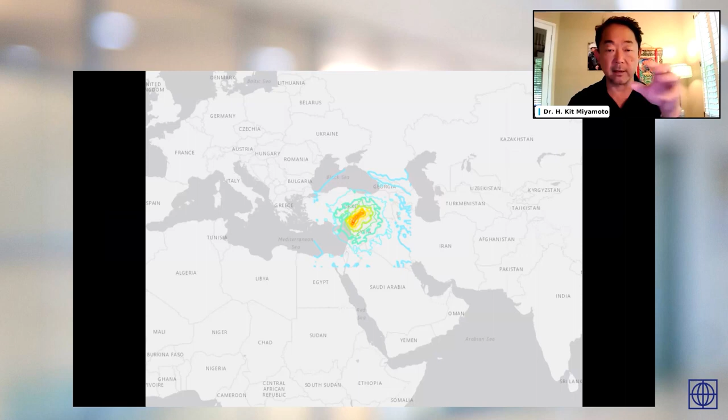Now, here is the location of the epicenter area of Turkey. You can see the Mediterranean Sea and the southern border right next to Syria. That's where the epicenter is.

The first one happened at magnitude 7.8, which is a big one, about 4 a.m. in the morning, and a few hours after, a 7.5 back to back. So it affected a large area—you're talking about a distance of probably 400 to 500 kilometers long and 100 to 200 kilometers wide, and a very mountainous area. So by any means, this is a huge disaster.

It's affecting almost 20% of the country. Unlike other earthquake places we visit, here it's huge mountains and snowy countries up in the high areas—unbelievable places. But it's also very difficult to get to certain areas, and the damage is widely spread across the whole area. This is truly one of the worst disasters I've seen, probably since the 2008 Sichuan earthquake. Some parts of the affected area are just destroyed, beyond imagination.

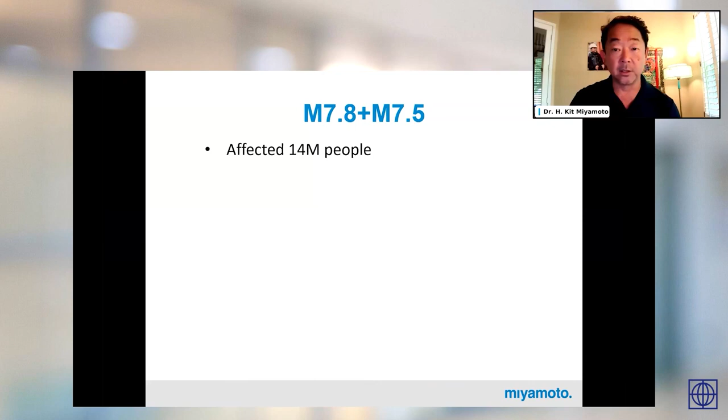So what happened here? It affected almost 14 million people in the area, and 1.7 million building structures. Most of the time, 95% of the cases, these are mid-rise apartment buildings, reinforced concrete, usually 3 to 10 or 12 stories, even in small villages—high density like that. So it's larger construction, and many newer buildings too. It seems there's been a lot of growth in the last 10 to 20 years, so there's a lot of new construction, but also a lot of older construction.

Initially it collapsed about 35,000 buildings, about 2% of the total. About 200,000 buildings are heavily damaged or close to collapsing, and about 500,000 more have light to moderate damage.

If you look at the total context of the affected area, this is something we see quite often—a 1 to 2% collapse ratio, about 10 to 20% red tag which is badly damaged and dangerous to enter, about 20 to 40% yellow tag, and about 50 to 60% green tag meaning nothing happened. So it's a huge disaster affecting a big area—that's why the collapse quantity is high at 35,000, but the 1 to 2% ratio is something you'll experience in different places.

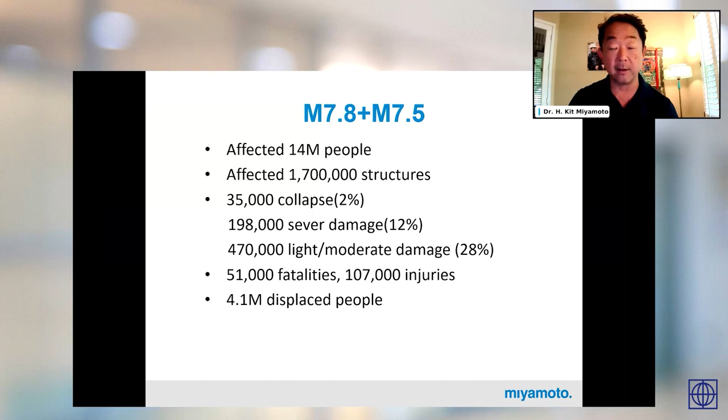It killed almost 51,000 people and injured over 100,000 more. The biggest part of it is 4.1 million people displaced—you're talking about 30% of the affected area population displaced. And this is close to the Syrian border, so as you can imagine, there are refugees.

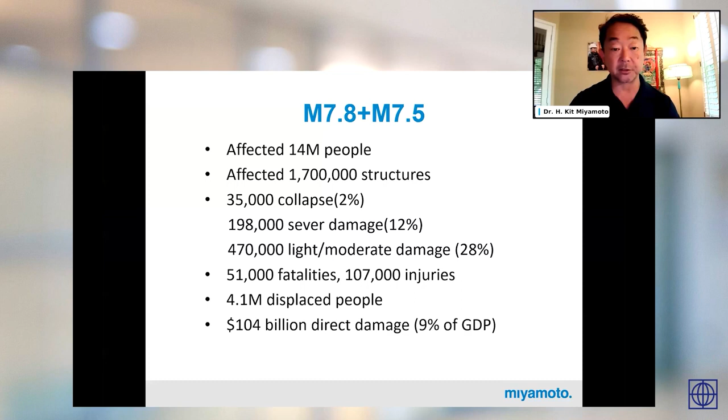It's about 10 to 20% of the population in this area, depending on the city, but there are recent refugees from Syria. Estimated direct damage is about $100 billion. On top of that, obviously job loss and many business losses, plus indirect losses which are usually 3 to 4 times more than the actual direct loss. So you're talking about a huge impact to this country—it's almost affecting 10% of the GDP.

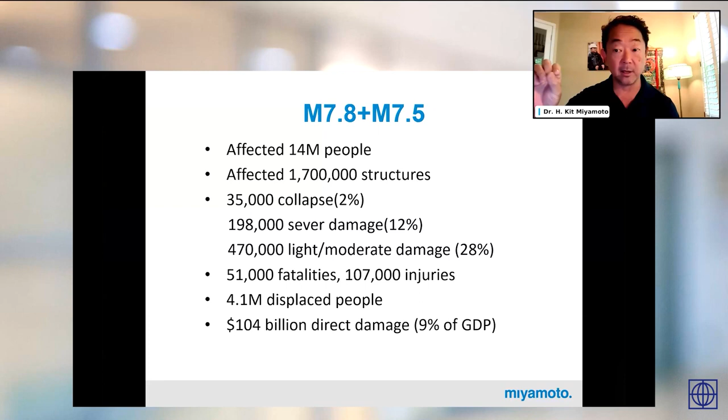But why did this happen? I talked about big earthquakes, big impact, that's true, but also the building code. Turkish building code changed in 1998 to address the seismic issue, which means anything built prior to that, around 2000 or so, has no seismic consideration at all. It changed after that, so it's good, but not before. Same thing applies to many different countries.

Most countries, this change happened in the mid-1980s, like Japan's case. In the United States, it's by 1973. So in the US, we have bad building stocks, really dangerous ones, built prior to the mid-1970s, actually.

A peculiar thing here, and we see this quite a bit in many different countries too, there's no license requirement for contractors. So if I decide to be a Turkish contractor, I can be one - that issue does exist. But probably more importantly, there is no inspection requirement for privately owned buildings by engineers. Sometimes contractors do hire engineers to look at things, but that doesn't quite work. There's no independence about it, independent engineers to review and oversee. That's actually a very, very critical part of it.

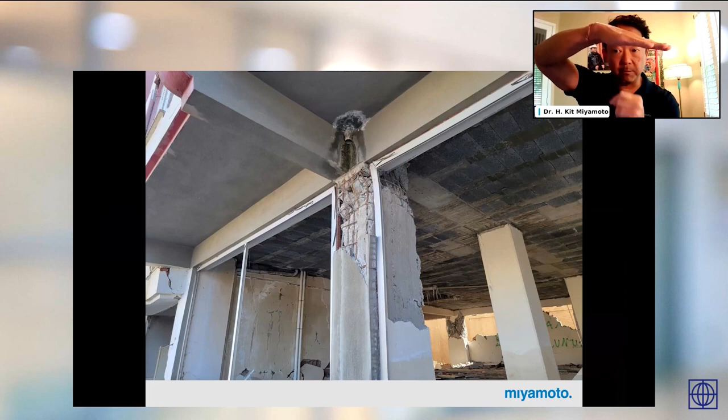And I see this in many, many different countries, and this is made a huge deal out of it. Now, this is one of the pictures I took, and believe it or not, this actually met the intent of a building code - it didn't collapse. This is a typical concrete column, like a pillar supporting the floors. Those columns are very important. If those pillars buckle or fail, everything comes down. So this is how critical it is.

You can see the little hoops around it, that's what we call a tie, and that actually keeps everything together. If it pops, everything goes. It's kind of equivalent to a wine barrel - you see the steel straps, they essentially do the exact same thing. Just think about it without straps, what's going to happen? The whole barrel will explode, right? That's exactly the same thing going on in a seismic condition for columns like that.

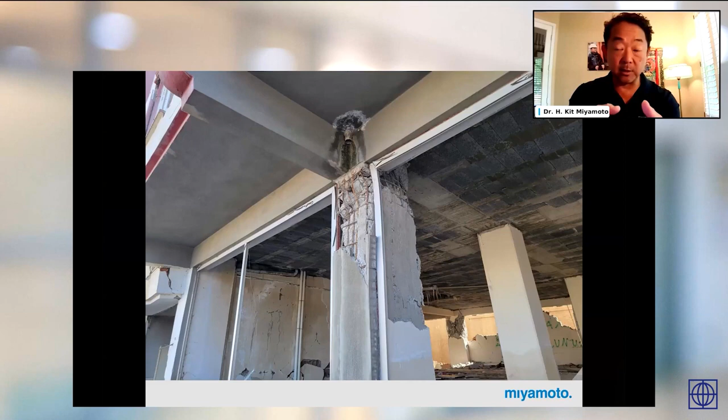But when we engineer buildings, doesn't matter if it's Turkish building code, Japanese building code, or American building code, it should look like this. A big earthquake like 7.8, 7.5 happens, and structural damage like this one here causes absorbing of seismic energy and it hasn't collapsed yet. So it looks scary, but it met the intent of the code.

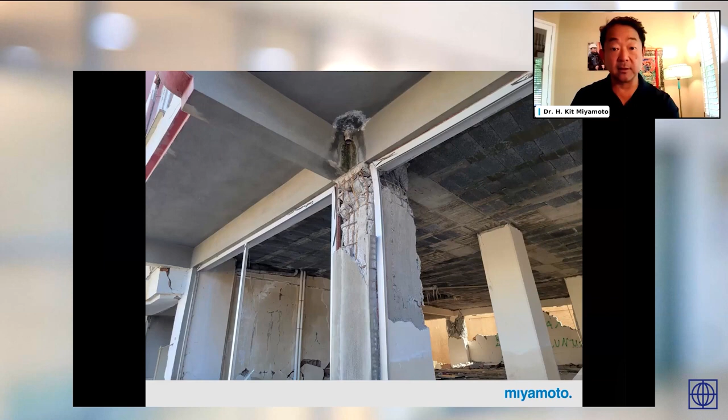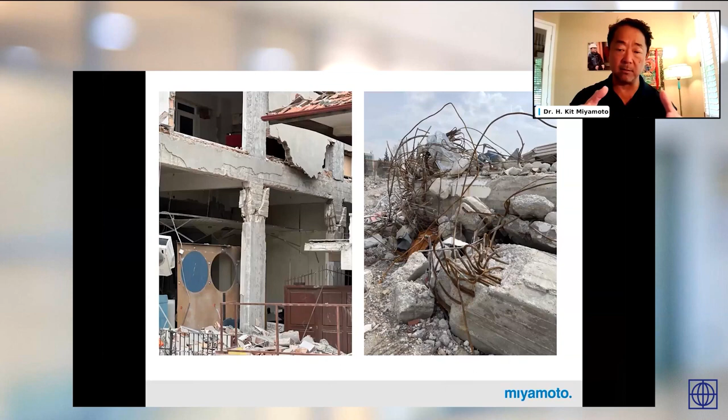Is this repairable? It will be very difficult. If the buildings aren't tilted quite a bit, it can be, but this case is maybe. In this case, you may be able to reinforce some more columns here. But in many cases, it's not like that - you're going to see a lot of collapse like that.

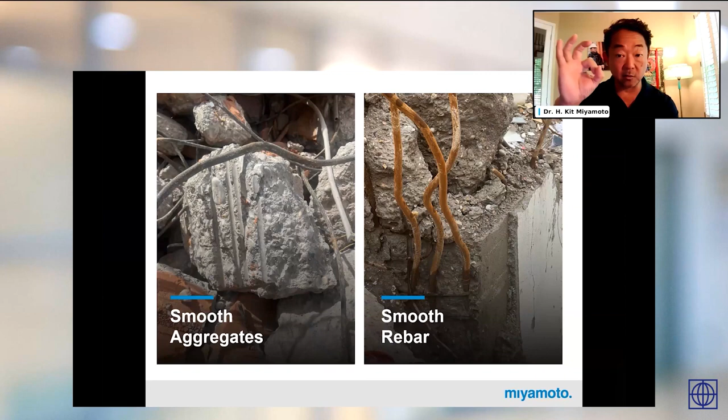What happened here? Well, in some cases I saw, actually smooth aggregate. See, concrete is made of cement, the powder, sand, also the aggregate, and the water. The aggregate is essentially rocks that bind together - that's such an important component of it. So that's why the aggregate is usually a ragged little piece of rock, like this. But I saw, in this case, river rocks like that. And also the rebar in this case.

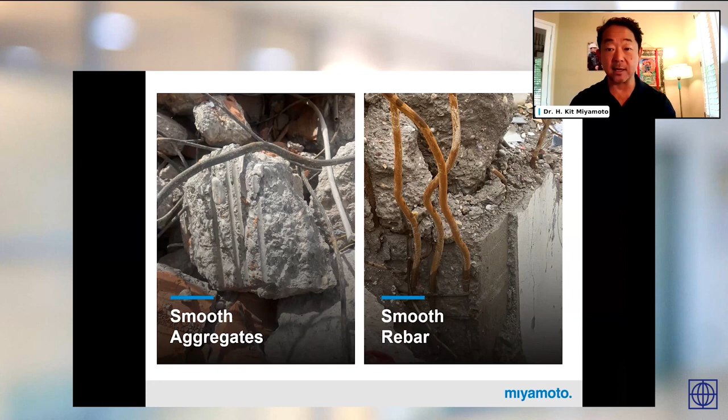Smooth, should it be deformed, and also how it's tied in - that kind of thing is very important. For example, these hoops I was talking about, isolated was a 90-degree hook. It should be, by the way, a 135-degree hook. It's little things like this, embedding into concrete and keeping together, that make a huge difference.

Media talked about corruption and fraud killing those buildings - I just don't see it. It's not because of the amount of concrete or amount of rebar. Each building I saw, both old and new, has just a lot in there, a lot of rebar and a lot of concrete. But I see little detailing missing, such as the little hook, such as using river rock versus the aggregate. Those are little things - it doesn't save much money at all whatsoever.

I think what happened here is a lack of knowledge among the laborers and contractors. That's actually causing it, which is why the inspection process is very important. Inspection doesn't mean just inspecting and saying okay or not okay - it's actually a discussion with contractors and laborers to help them really understand the importance of these things. Because most of our contractors and masons, if they understand that some of these practices kill people, they wouldn't do that. And because they're locals, they don't want to harm their neighbors and friends and family, just doing their practices. So capacity building is a very important part of it, through inspections and so on. This is something we see results of everywhere, even in a poor country like Haiti.

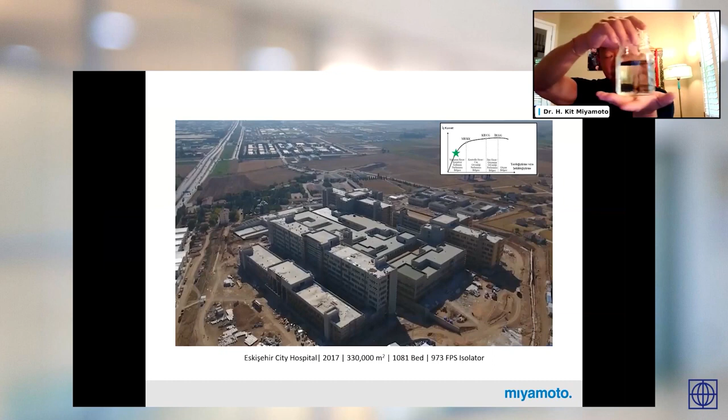Hospital. Now there's about a dozen hospitals in this area, and it has what we call base isolation. What base isolation is, essentially the building sits on the ground, and when ground shakes, building shakes with it. But base isolation isolates the building itself by the roller, so when the ground shakes, the building base gets stable. That's what the system looks like. This is one of the videos taken.

So there are hospitals, dozens in this area. Not only did they not get damaged, but also they're functional after the earthquake. Think about it, functional after the earthquake. That's a pretty amazing thing.

So technology works, and Turkey does have probably one of the best building codes, by the way, and engineers, education system, everything there. That's why you see the evidence of it. However, once you come to private buildings like that, it doesn't quite work.

And also we saw a lot of public infrastructure which performs so much better. You just saw the evidence of the hospital, but also roads, bridges, education facilities, they perform much better. Why is that? Because they're inspected. That's simple, actually doesn't take that much.

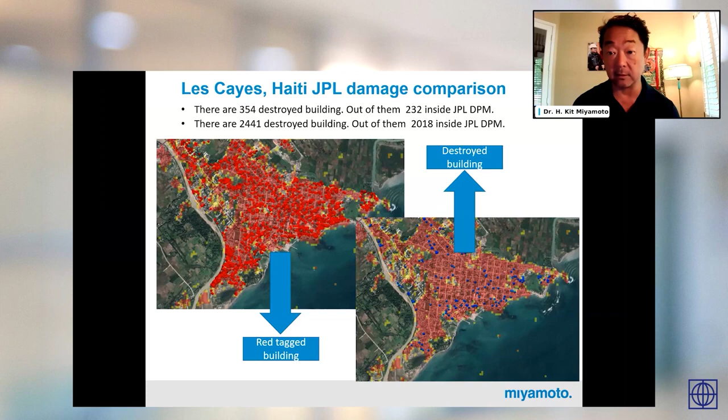This is something we've been working with for a little while, to see how good those things are. For example, in this particular case in Haiti, 2021, on the ground we assessed that 2,400 buildings are damaged, but the forecast by JPL, NASA was about 2,000. So it's not 100% accurate, but it's good enough to really show the locations of damage concentration, and we can direct our effort to the particular area.

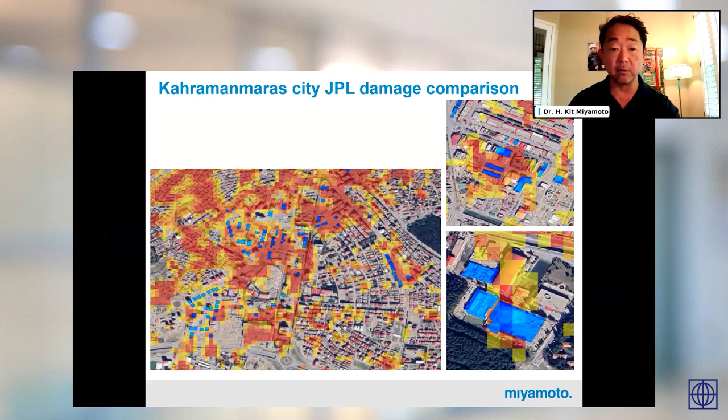So this is actually very, very important. This is something that as we go through in the first week, we publish it, put it in the public domain, and send to governments, UN agencies, and embassies to assist with that.

So just going through a couple of cities and what we saw - Iskenderun. Iskenderun is almost closer to Cyprus, closer to the Mediterranean Sea down there in the south. The destruction is pretty heavy because it's along the ocean, very soft soil, and a big river coming through. Almost 40% of the buildings are damaged, heavily damaged actually.

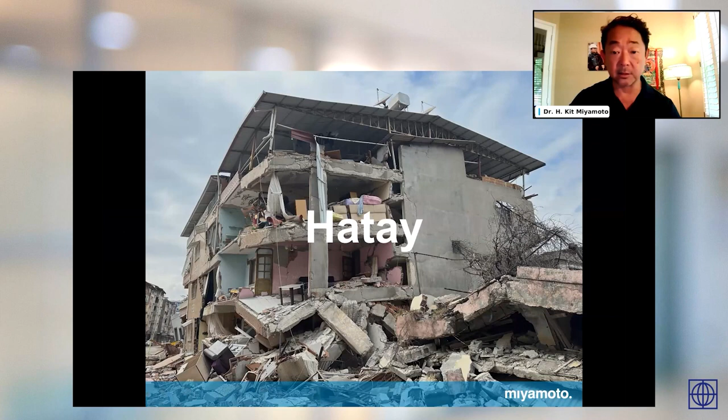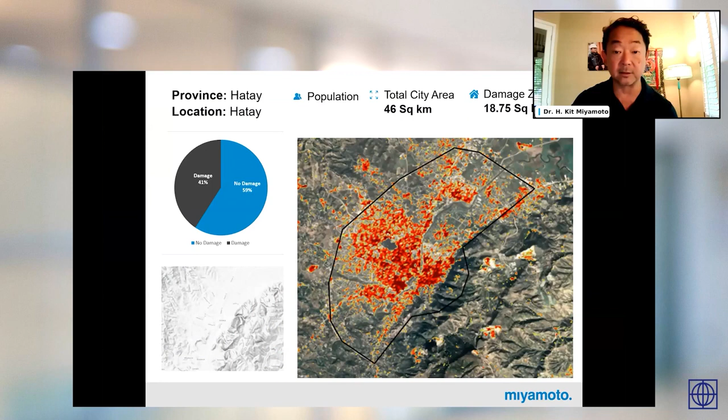Hatay is an ancient town of Antioch - maybe some of you know, read history books - but it was a beautiful ancient town. It's fairly far from the so-called epicenter, but destruction was tremendous. It's almost 40% concentrated in a very small historical area, by the river again, so you can see the very soft soil.

And you're going to see things like this - you can drive through from edge to edge, probably 30 minutes, and you're going to see this essentially destruction throughout that landscape. I have never seen that for quite a long time. This is almost equivalent to some sort of a bomb blast on a big scale going on. There's just no chance here.

But again, even in the middle of destruction, you see new construction like this standing tall without any apparent damage whatsoever. This is in Hatay, right in the middle of it. It's new construction, so if it's done right, it's not a problem. Turkish building code is good.

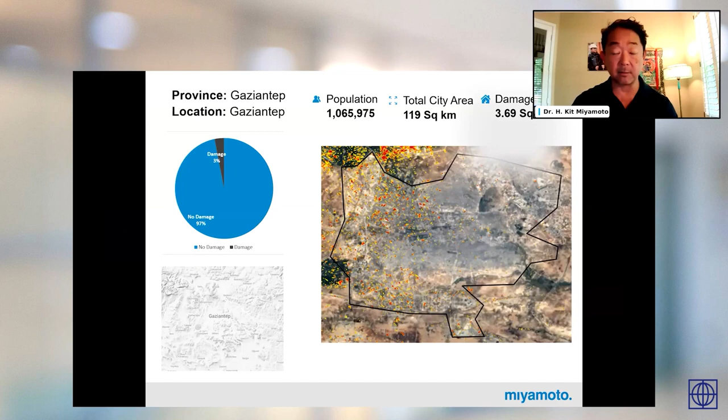Smaller constructions are fine also. Gaziantep, that's where our office is currently located. Gaziantep is an ancient town. It's right at the epicenter, by the way, but damage is very limited—it's 2 to 3%. You can see the northern or eastern part a little bit, some red and yellow. That's what damage looks like, and it has a lot to do with the soil characteristics here.

This is a nearby road. You can see the rock exposed—there's a lot of hard rock going on. So if the city sits on rock, sites like this, it's completely different. Over the years, going through earthquakes, having good buildings is very important because good buildings can withstand either hard or soft soil. There's not a problem at all.

It's usually evidence of the time, right? But if you live in bad buildings, you definitely want to be on a hard rock site. Give me one example: the 2015 Nepal earthquake, Kathmandu. The epicenter was several hundred kilometers away, long away, but Kathmandu got affected quite a bit because that city sits on about 400 to 500 meters of very deep, super soft clay soil, really soft, almost like jello sometimes. So that's what the buildings, structures, or city sit on, and it vibrates in a long-distance earthquake.

When it vibrates from a long-distance earthquake, you know what gets damaged? Tall, high-rise buildings. Smaller construction made of brick has no damage at all. But once it comes to taller buildings, the damage is a lot—it's tremendous. So it has a lot to do with what type of frequency is coming through, what kind of soil you're on, and what type of building you're in. That makes a big difference in survival. But if you have good building technology, good structure systems, and good inspection, it can take it all.

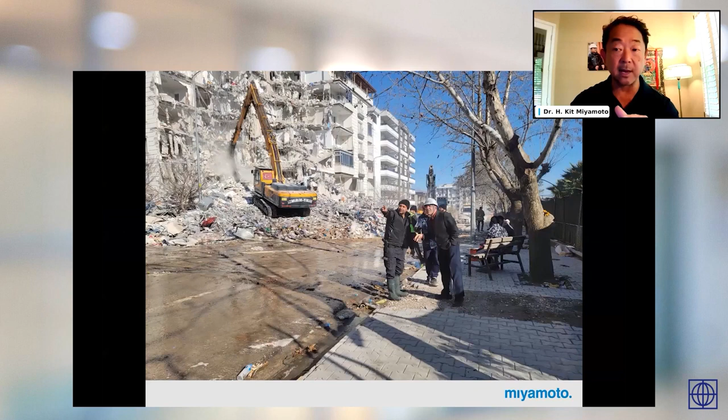The highway freeway system, within 48 hours, was pretty much available everywhere. And on the freeway, you can drive 110 kilometers per hour anywhere. Damage is limited, but some certain little things happened, fixed really quickly, and they were able to open it up.

Demolition. This is day 3. You see the contractors working through to taking down the dangerous buildings. This is something pretty incredible, you don't usually see that. They're just taking down really quickly to remove this risk from the community, so people can get back to their normal life as soon as possible. Today it's a huge effort. Much of the so-called half-collapsing buildings have already come down, and they're actually reconstructing some of the apartment buildings already.

So things like that everywhere. The emergency response component is definitely something they did right. I have no question, and I don't know exactly how they can improve what they did. But one thing I noticed is you don't see that many international UN agencies, because I think the Turkish government decided they can handle it, and it's probably true. They were preparing for an Istanbul earthquake after all, a city of 20 million people. That's why they had a supply of tents and everything set up, so they could deploy quickly to that southern border. That's something pretty amazing.

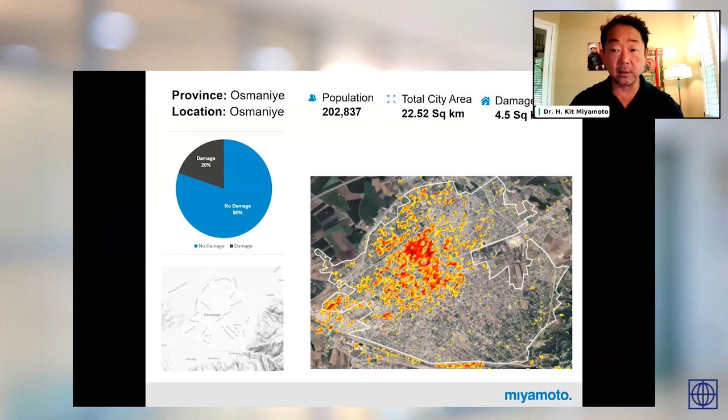So basically, what we are looking at right now is the town of Osmaniye, and how we can actually get into the repair components of Gaziantep. So let's take a look.

So we talked about the heavily damaged buildings, which I showed a lot of pictures of, right—35,000 or 100,000, stuff like that. But again, there's about 500,000 more buildings which have been damaged, but they're lightly damaged. This one here I call lightly damaged. It doesn't look so good, but it's actually not that bad, because the structural elements—columns or pillars—are actually intact. What's cracking here is the infill walls, made of a block of brick and plaster, cracked. So once you replace or repair those things, it goes back to the original state. That's actually very important, because remember, 4.1 million people lost homes.

They're living in tents. They need to come back. They have to bring back normal life as soon as possible. So addressing these lightly or moderately damaged structures is a very critical component of that. Again, we classify this as lightly damaged because there's no structural damage at all—you just see a little pounding like this. This is actually a stable mechanism, because the floor-to-floor matches absorb a lot of energy by doing that.

So currently, funded by working with the USAID and CRS, we're addressing this 470,000 building stock of repairable houses. We're also making an assessment of each of these and communicating with the communities and the governments. So we are first working with Gaziantep, the city of Gaziantep, to start assisting them in looking at those lightly damaged constructions.

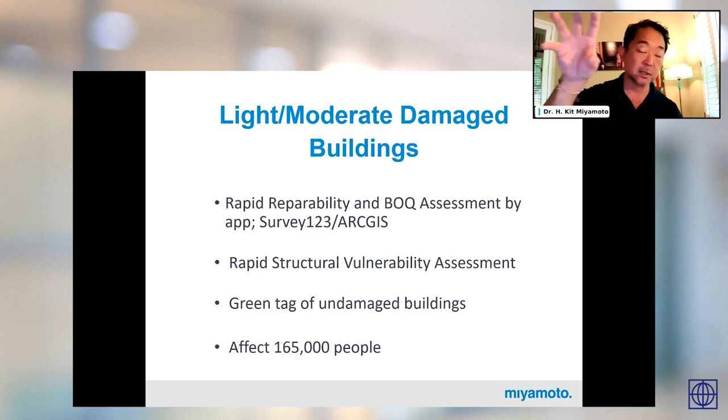Thirdly, we looked at green tagging of undamaged buildings, because QR codes are great, but sometimes it's hard to see what's going on. So having a more visual communication tool, some stickers with a green tag, so people can understand it's undamaged. This first program affected 165,000 people.

This is a Turkish person I met in the field, and he was in the video, right? Something else, you know. Right after the video we took, he asked me to come up to his apartment. He's living on the 4th level of this 5-story building, and he wanted to know what we thought about these things.

I saw a lot of cracks there, but they were non-structural damage. So we talked about how it can be repaired and how fast it can be done. He was very happy, obviously, because he understood it was a lightly damaged building.

So what he did was give me his childhood scarf. He said he'd owned it since he was 6 years old. I said, oh, thank you, but no, I can't take this.

But on top of it, he gave me this medal. He was a Turkish special forces member and had this gold medal, and he insisted on giving it to me. I said, there's no way I can take the medal from you—that's really important, I just looked at cracks. But he insisted, and my Turkish partner basically said, you better take it, otherwise he's not going to leave you. So I took it. It's just pretty amazing, incredible.

And he had this Turkish flag in a flying hat. It's just amazing people. This is such huge destruction that happened to this country, and there's incredible challenge ahead, no question. But I do believe that if any country, any people, can come back strong, faster, and actually stronger and safer, it will be the Turkish people. I have no question in my mind.